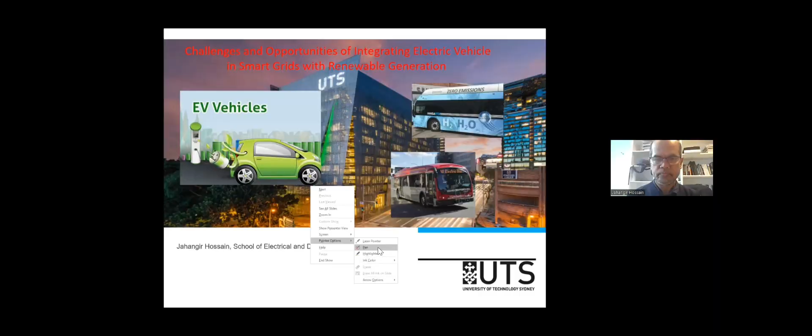Again, I would like to thank you for inviting us to share some of the research that I'm currently doing on renewable energy and also smart grid and the microgrid area. So the title of my talk today is challenges and opportunities of integrating large-scale electric vehicles in smart grid with renewable generation. So that would be my overview of my presentation.

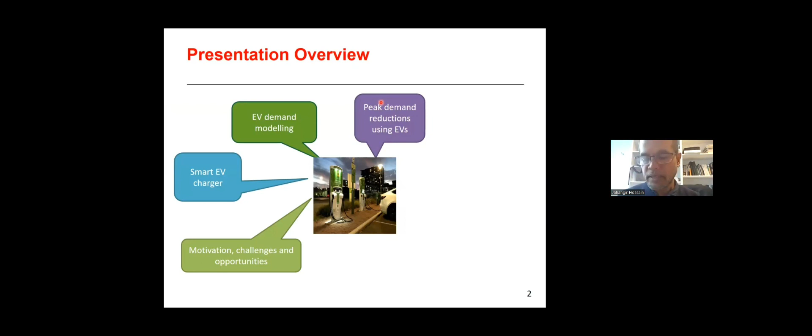So initially, I will start with some background and motivation. Then I'm going to show some of the work that I'm doing on electric vehicle charging systems and also electric vehicle modeling and also integrating large-scale electric vehicles in the smart grid or microgrid. And then I'm going to briefly show some of the other projects that I'm currently leading at UTS.

Now, as you know, due to this large-scale renewable energy integration or energy transition, there are several changes happening in the power grid. For example, if you think about the generation side of the power grid, mainly the large-scale centralized fossil fuel power station is being replaced by small size renewable generation. Because as you know, currently most of the power is coming from centralized power stations, which are mainly powered by coal, gas, and other fossil fuel sources.

Now, if you go to the transmission sector, due to large-scale renewable energy generation, there are some changes happening. For example, you will see many fast, accurate measurement and monitoring devices, for example, phasor measurement units, many power electronic-based controllers, for example, STATCOM, SVC, and also high voltage DC is getting more popular than high voltage AC.

Now, the biggest changes are actually happening in the distribution sector, where you'll find many small size distributed generation, for example, photovoltaic systems, wind turbines, biomass, and so on. Another technology also getting popular is microgrid. And then you'll also find many smart meters, and then new types of load, which is plug-in electric vehicles or electric vehicles, which is actually the main topic of my presentation.

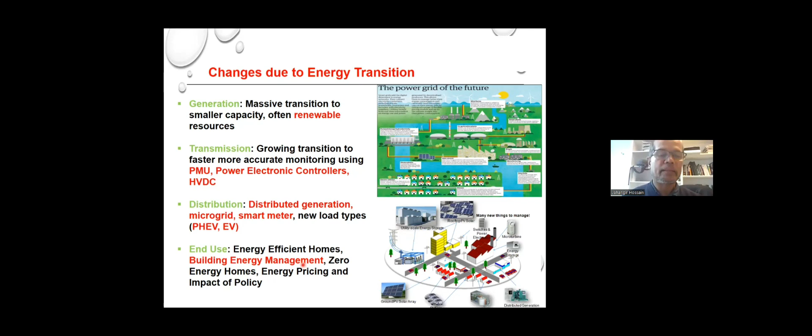Although I have done work in all of these areas, today I'm just going to highlight the electric vehicle side. Now, even after the electricity meter, many things are happening. For example, building energy management systems, zero energy homes, and then energy pricing and so on. Now, let's move on to the electric vehicles.

Now, the electric vehicle is actually not a new technology, although it is getting popular now. The first electric vehicle was actually built in 1981 by a chemist from UK, whose name was William Morrison. So the first vehicle was built in Des Moines, Iowa, USA. And the maximum speed of that vehicle was 20 miles per hour. That vehicle was powered by a 24-volt battery. And with a single charge of the battery, the vehicle could run maximum 50 miles.

Now, after that, for more than a century, nothing much happened for electric vehicles due to political and other reasons. But as you know, in recent years the electric vehicle is getting popular all over the world, including Australia and other countries.

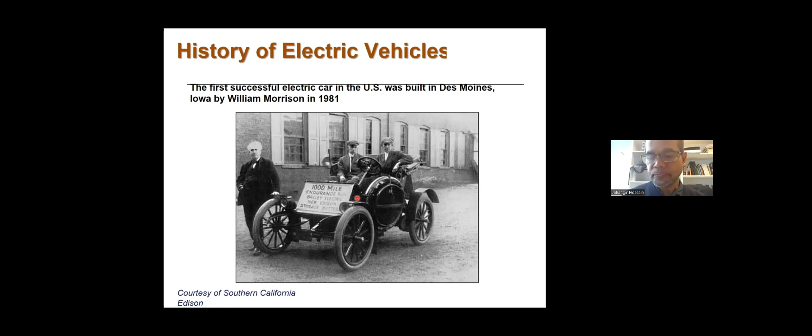And the reason behind this is because the transportation sector is actually responsible for producing almost 1/3 of total greenhouse gas emissions. Now, as you know, most countries have set a target to go net zero by 2050. To achieve the target, the transportation sector has to be electrified. And that's the reason that by 2050, most of the current IC engine-based vehicles will actually be replaced by electric vehicles. Now, there are actually a number of reasons why the electric vehicle is getting popular.

And the first reason is lower lifetime cost. Although you can say that the upfront cost for an electric vehicle is very high, like when you buy, the price is still high. But if you compare the lifetime cost, today the electric vehicle is actually less expensive than the normal IC engine based vehicle. And here you can see that initially the electric vehicle was costlier than the IC engine based vehicle, but after a few years the electric vehicle is cheaper than the IC engine based vehicle.

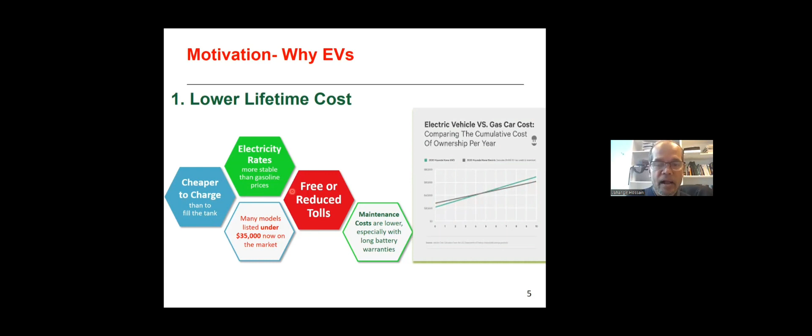And there are a number of reasons. Because it's cheaper to charge than to fill the tank with petrol. The electricity price is much more stable than petrol, because the petrol price actually varies even within a week. An electric vehicle has less maintenance cost, and in many countries there is no toll, and also many governments are providing subsidies or making it tax free when you buy a new electric vehicle.

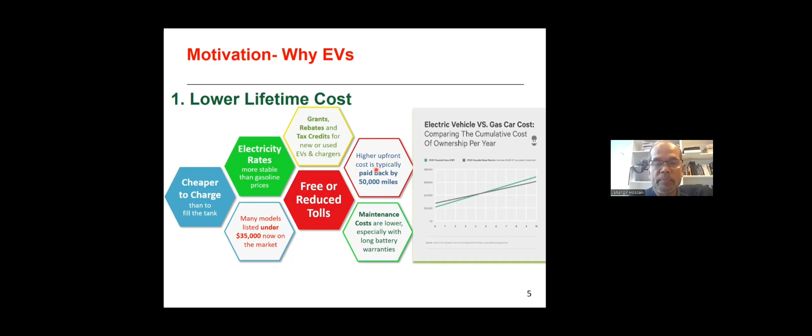And with one set of batteries, you could run almost 50,000 miles with a single battery. And with that, the lifetime cost is already cheaper. The second reason for getting popular is that the efficiency of the IC engine based vehicle is very low.

Now this figure is just showing some data from 2005 Toyota, but even if you use a recent vehicle, the efficiency would be in the range of 20%. What you can see here, for example, if you have a Toyota 2005 vehicle and you are taking, let's say, 100 liters of petrol, out of 100 liters of petrol, what is happening? Almost 76% of the energy is lost in the IC engine. And on top of that, another 8% of energy is lost in idling.

Idling means that your vehicle engine is on, but you're just waiting in front of a red signal or in a traffic jam. So at the end, only 16% of the energy is transferred to the drive line. And in the drive line, another 3% of energy is lost as mechanical loss. So at the end, you are getting only 13 to 20% efficiency.

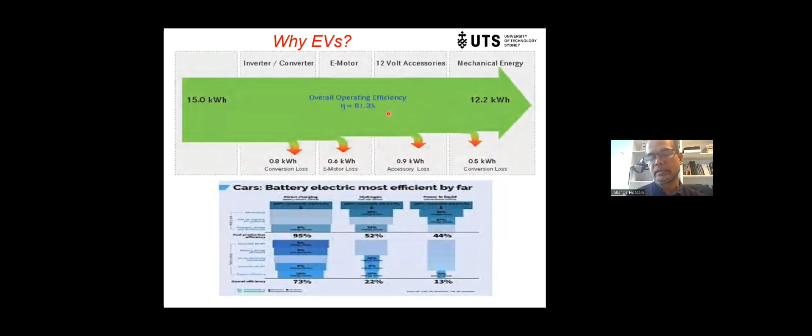But for electric vehicles, the efficiency is much higher. If you compare the overall efficiency, considering the losses in the inverter, charger, motors, and all of them, efficiency is more than 80%. So it is much more efficient than an IC engine based vehicle. And as I said, it's lower maintenance, because for electric vehicles there are no spark plugs, there are no timing belts, there is no oil change. And as I said, the electricity price is lower than the petrol price.

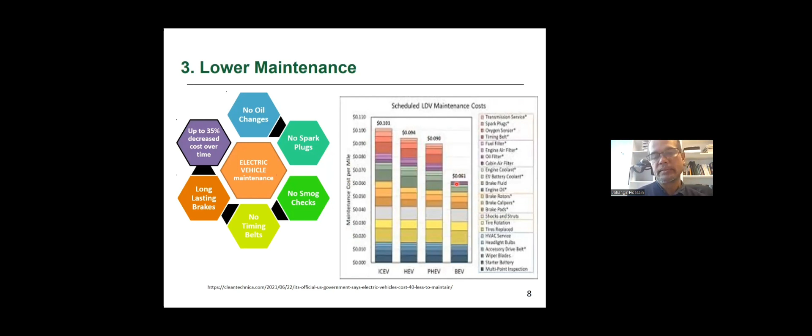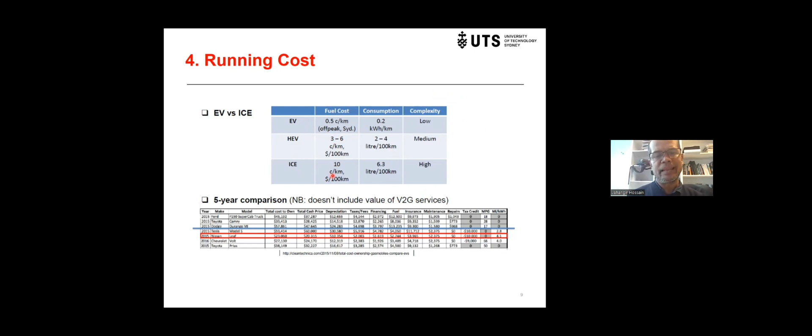Here I just compared the running cost per kilometer for different types of vehicle. The battery pure electric vehicle's maintenance cost is lowest compared to plug-in, hybrid, or even IC engine-based vehicles. Even if you compare the running cost, electric vehicles are much cheaper than IC engine-based vehicles. Here we just calculated the price per kilometer with the Sydney electricity price for EV, hybrid, and IC engine-based vehicles. For EV, it's 20 times less than an IC engine-based vehicle.

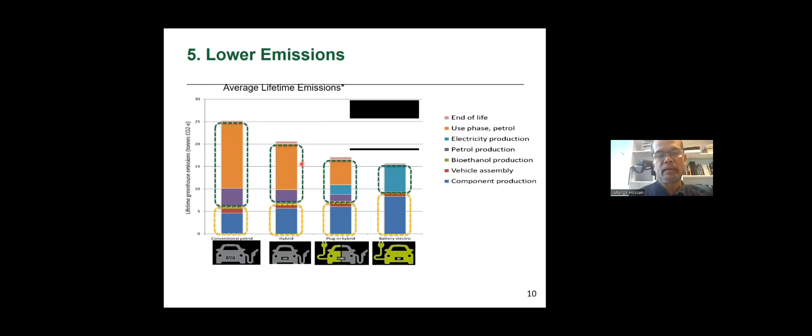And also, as I said, it is environmentally friendly. The emission is much lower than a normal IC engine vehicle. Now, in terms of technology, there are many technologies available powered either by battery or hydrogen fuel cell. And for battery, it could be a hybrid electric vehicle, plug-in hybrid vehicle, or pure electric vehicle. I think in coming years, the pure battery vehicle would be most popular for small-scale cars. But for heavy vehicles like trucks and trains, maybe fuel cell powered electric vehicles would be more popular, because for heavy vehicles you probably need frequent charging. In that case, hydrogen would be a better choice than the normal electric battery.

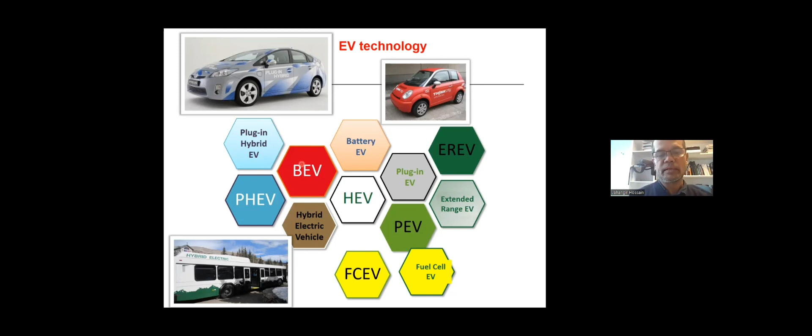Now, if you want to buy an electric vehicle, there are a few things you need to consider. For example, what sort of driving range you need for your daily use, and what sort of charging infrastructure you have. Is it charger level 1, 2, 3, or 4, which I'm going to discuss in the next slide. These are things to consider if you're planning to buy an electric vehicle.

Now, there are some challenges why the number of electric vehicles is still not very high, and here I have mentioned some of them. I already mentioned the cost of electric vehicles, the range of electric vehicles, and also the charging infrastructure. But the good news is that the battery price is going down almost 15% every year. For range, although the average range is about 135 to 140 kilometers on a single charge, with the latest Tesla you can actually run 700 to 800 kilometers on a single charge.

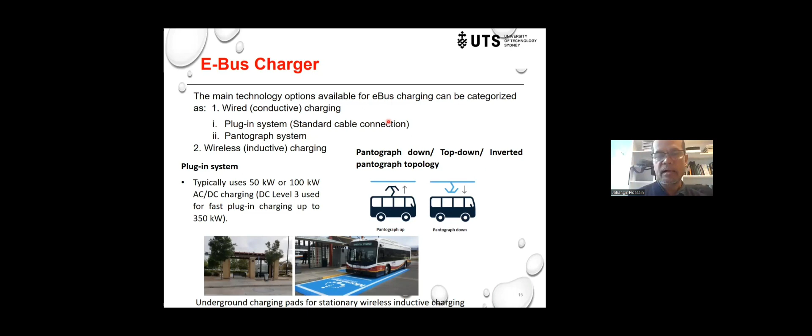The pantograph one works when the bus is just stopping, either to take more passengers, and during that time there would be an overhead charger which automatically connects with the bus's charging system. The bus gets the opportunity to frequently charge, and that's how it will not need a very big capacity. But if you use just a standard cable, because the bus will run the whole day, you actually need a very high battery capacity, which is not economical.

In coming years, you will have electric car charging systems in industry, in your office, in your home, in the shopping center, and so on.

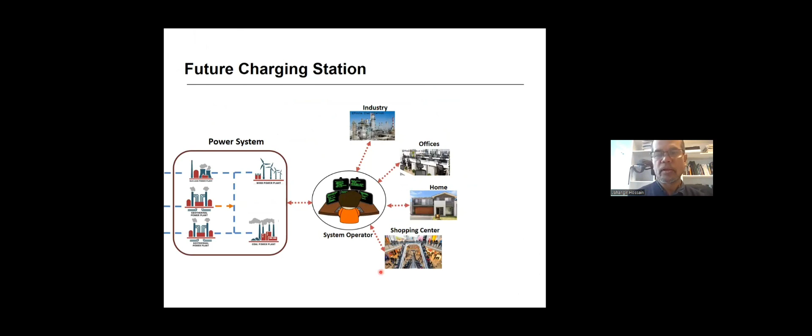As I said, although the electric vehicle number is quite low, the number is actually increasing significantly. But in some European countries, they already have more than 40% of vehicles as electric vehicles. One example is Norway.

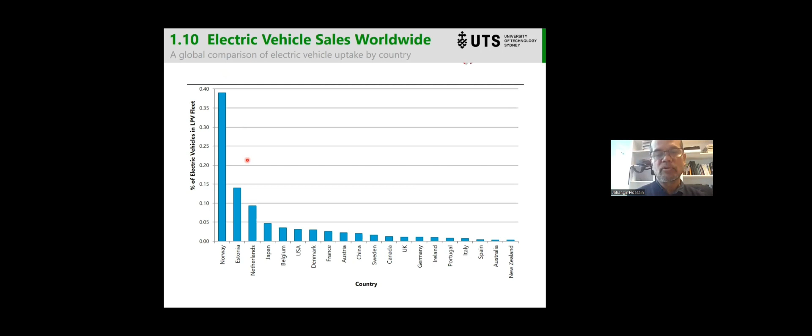But in Australia, the number is quite low. By 2030 or 2035, almost 30 to 40% of vehicles will actually be electric vehicles.

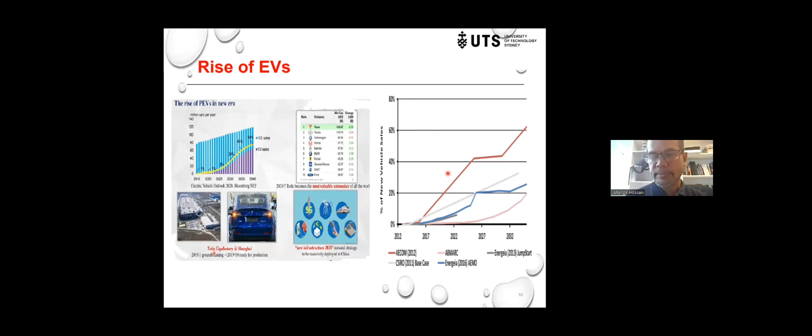Now, what happens when you have a significant portion of vehicles as electric vehicles? The electricity demand on the grid will go up significantly. And if we can't take appropriate action to control the charging and discharging of the battery, it will have significant impact on the power grid.

Here in the top two figures, you can see the black line showing the current electricity demand in two states, Texas and California. If they have 100% electric vehicles, the blue one would be the additional demand on the electricity grid. The bottom figure shows the additional power requirement from the electricity grid when they have 100% electric vehicles. So what I'm trying to say is that it will have significant impact on the power grid in all countries, including Australia and Indonesia.

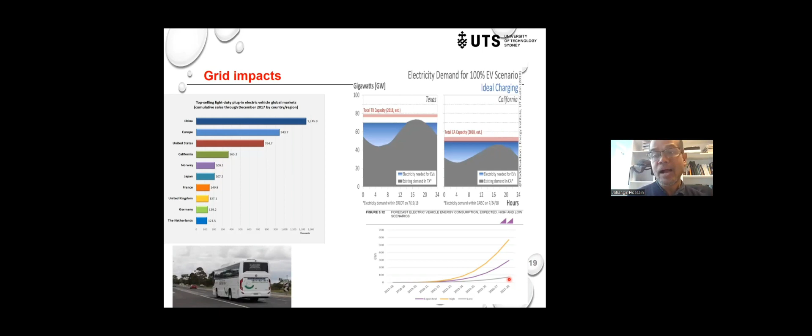So we actually need to have a proper plan for how we're going to manage large scale electric vehicles in the power grid. When you have large scale electric vehicles in the power grid, there will be a number of challenges. For example, it will have significant impact on power quality, voltages, frequency, and so on.

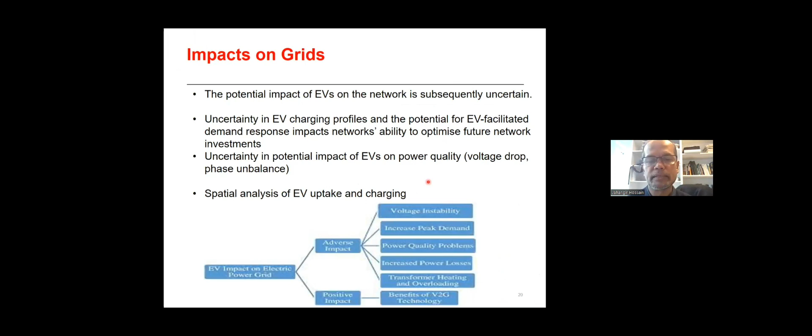But the good news is the latest technology, called vehicle to grid. So it's not only that you will charge the vehicle from the grid, but it will also have the capacity to feed power back to the electricity grid using this technology. Once we have that technology, it will actually be able to solve some of the problems introduced by large scale renewable power integration.

Although this technology has got potential, there are still some challenges we need to address. For example, as I said, this could be a source or sink of power. It has a very high reaction time, and it's like an intermittent mobile source because you don't know the exact location of the electric vehicle. If we can address those challenges, it can actually have a positive impact instead of a negative impact on the power grid. And this technology, vehicle to grid, is already available in the market.

There was a project in Australia, in Canberra. In this project, during the COVID time, what happened was this guy was just participating in this trial. While during COVID he was not driving the car, what he was doing was buying electricity at off-peak time and selling it back during peak time. That's how he actually made quite good money while his car was just parked in his driveway.

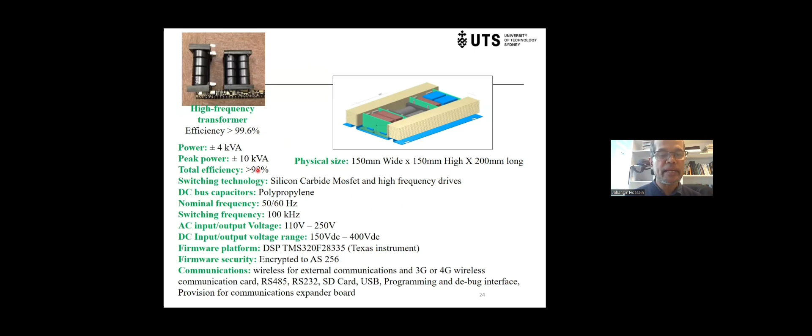The good news is the contribution from our side was including a number of new control capabilities with the car charging system, which not only charges or discharges, but when connected with the home or grid, can actually solve many of the problems created due to large scale renewable energy integration. Some of the control functions include charge, discharge, and ancillary services like reactive power control, voltage control, and harmonic reduction.

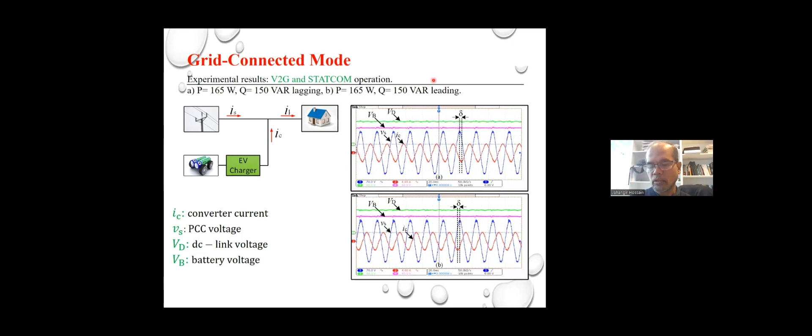So once this is connected, it not only charges, but also solves that power quality problem. This one shows it can actually improve power quality. Here you can see the source current is quite distorted, not a sine wave - this is before connecting our charger. But after connecting the charger, you can see this source current is quite smooth and sinusoidal.

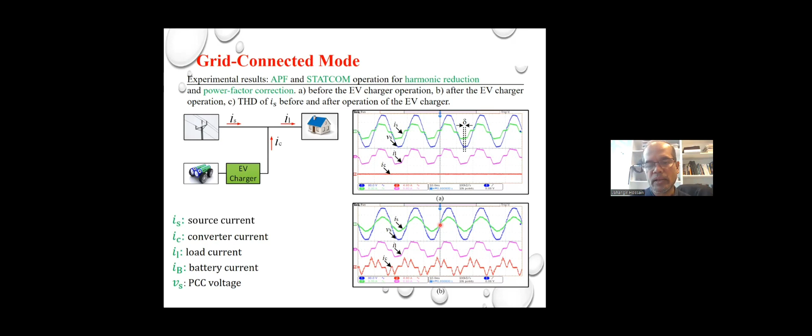In terms of percentage, before connecting our charger to that particular home, the total harmonic distortion was 23%. But after connecting it, it actually went back down to 3.2%. And the standard is that it has to be less than 5%.

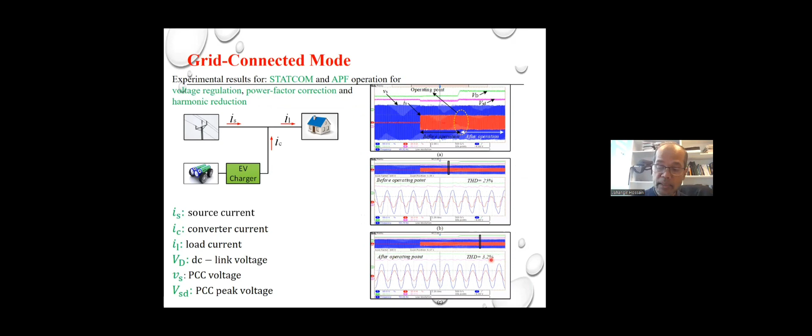Not only that, this charger also has the capability to transfer power from one vehicle to another vehicle. For example, let's say you're driving in a remote area where there's no car charging system available, and suddenly your battery goes empty. The current practice is that you call an insurance company, and that company comes with a big truck with a battery, then charges your battery so you can run your car again. But the good thing is that if someone uses this car charging system, if you have two vehicles nearby, it can easily transfer power from one vehicle to another vehicle.

We also compared the performance of this one with a US patent in terms of overall efficiency and capability. This one also has a safety feature - when it's connected with another vehicle, you can't run unless it's disconnected. That control function is provided through the control pilot and proximity pilot of that particular V2V cable.

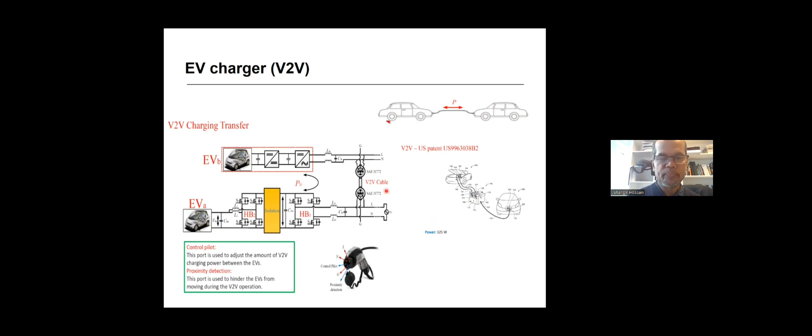Now this one shows again that one of the vehicles is charging and another is discharging, just to prove that concept that I mentioned earlier. Now this is more at the technology level.

Now what happens when you have 100,000 vehicles? The first problem we tried to find out was how you can actually estimate the demand you need from the electricity grid when you have so many electric vehicles. There are a number of uncertainties if you're going to model that electric vehicle demand, because you don't know how many kilometers you will be running per day. You also don't know your starting location, your destination, the road condition, traffic signals, driver behavior, or what sort of car charging technology you're using. So there are so many uncertainties involved.

In one of the projects I was involved in, we designed a car charging system for a shopping center. There is a shopping center near our university, so we collected some data from that particular shopping center, and then we designed the conceptual framework.

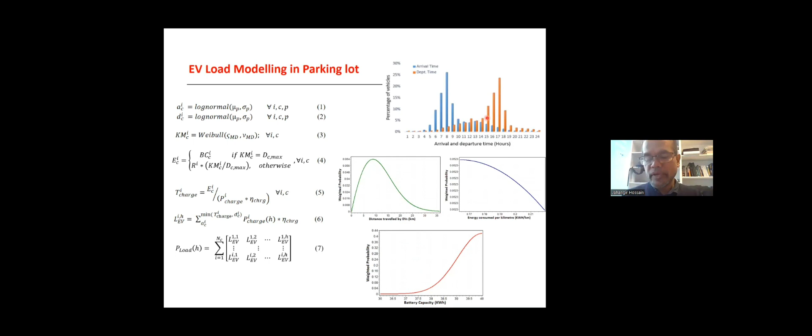we managed to get some probability function that actually gives us arrival time, departure time, like what time the vehicle is coming, what time it's departing, and on average, what sort of power is needed for a particular vehicle. And then considering all different types of technology, we managed to get what would be that particular demand for that particular shopping center, and then what sort of power we can get from that photovoltaic system.

We use that real temperature and the radiation level that is available for that particular shopping center. And then using all those Monte Carlo simulation and stochastic modeling, we managed to develop an optimization algorithm that actually gives that what sort of capacity is needed for that

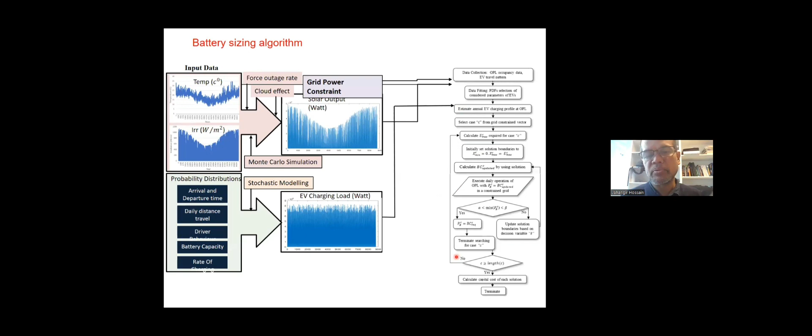battery, and then what sort of capacity is needed for energy need, so that it actually does not violate the maximum capacity of this cable, of the transformer and everything.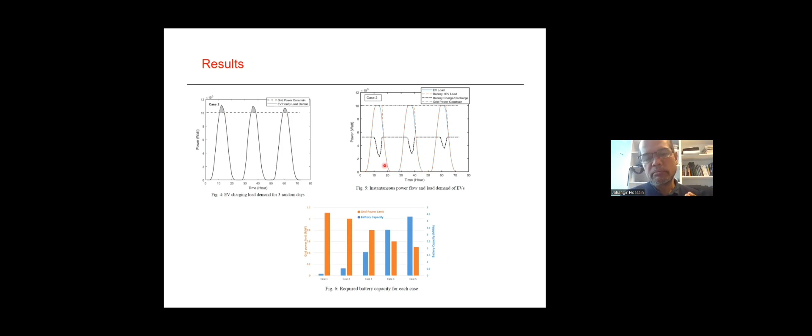And then we compare what will happen without optimization, if you just design the system without considering all those factors that I mentioned. We did simulation and we saw that sometimes it actually violates the capacity of the transformer, which is not accepted by the power grid. And also we did cost benefit analysis with different battery capacities and so on.

Now I'll just show you one more application with the technology that we developed, and then I'll try to finish it. So the next application considers 3 different technologies, like the photovoltaic system, normal battery and electric vehicle, just to show that if we have got a city, for example let's say like Jakarta - here I consider Sydney.

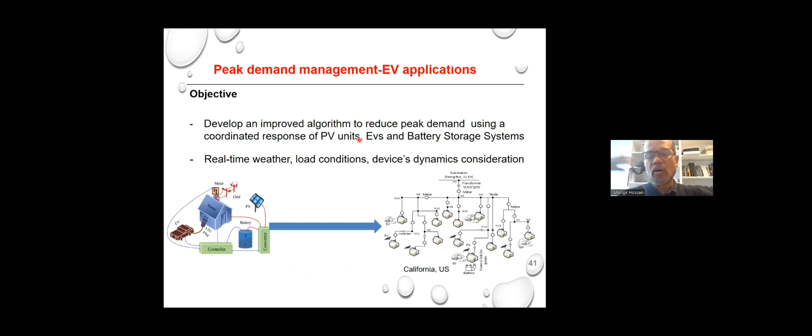If we use that 3 technologies, and then if we actually control the charging and discharging of all this battery, we can see how we can reduce the overall peak demand of that particular city, which will contribute to making the system more energy efficient, and at the same time it will also reduce the electricity price.

Now to do that, we consider different sorts of control. We also consider the remaining capacity of the battery so that it doesn't interfere with the daily use of the electric vehicle. Now with all of this, we developed that model.

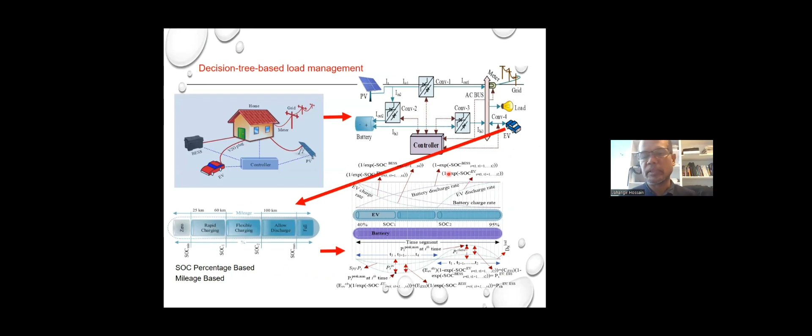And then we implemented it both in the software platform and also in the laboratory with smaller capacity. And here also we developed some optimization using the decision tree and also the artificial intelligence. And then we also compared the performance of both these technologies.

And then we collected the real data from one of that electricity distribution utility, Ausgrid, here. And then we implemented our algorithm with the current electricity demand. So you see that the red one is the current maximum demand.

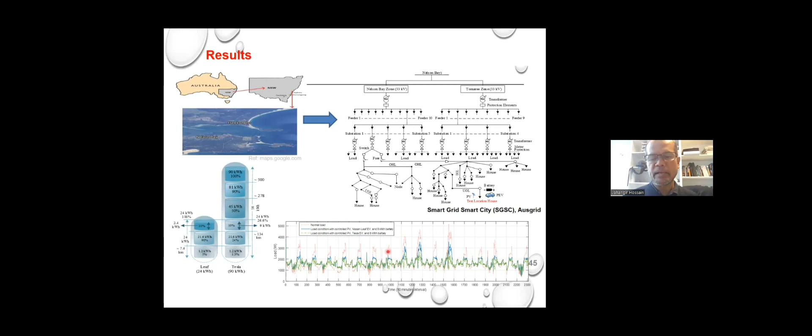But if we use that algorithm that we mentioned here with 2 sorts of electric vehicle, one with a small size battery capacity and another with large battery capacity, shown in blue and green, you can see the electricity peak demand can be reduced significantly using that algorithm that we mentioned.

And again, we compared with the artificial intelligence based algorithm as well, just to validate our idea. And then we implemented it in the lab as well, just to show that it can actually be implemented for a real system, using real devices in our laboratory.

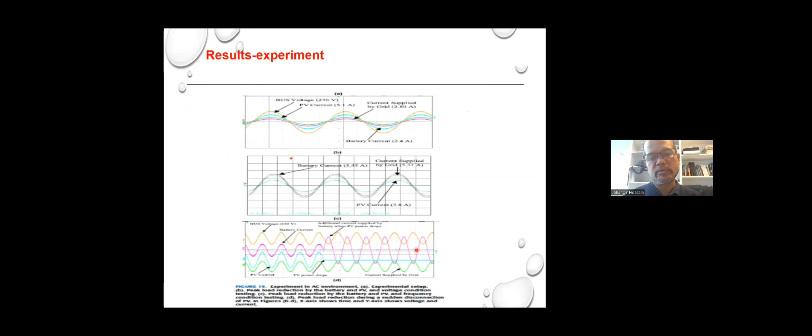Then currently I'm also doing some projects in the microgrid, and one of the projects funded by the Australian government, which is almost $1.6 million. And we are actually building a real microgrid.

And also here we are developing different software and control algorithms for real-time monitoring and also control and forecasting, everything. And also we are connecting with the particular community in that area just to address what sort of concerns they have about that particular microgrid, which is now running in its 2nd year.

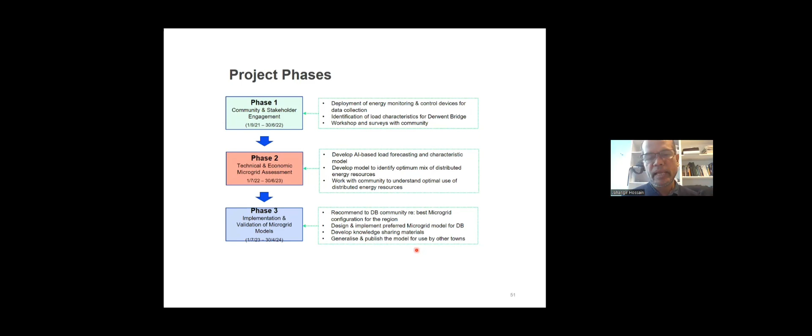And if I get another opportunity, maybe later, I can show some of that technology and algorithm we are developing from that real microgrid project that I'm doing.

And here we have got a number of industry partners involved, from the technology level, also the power grid.

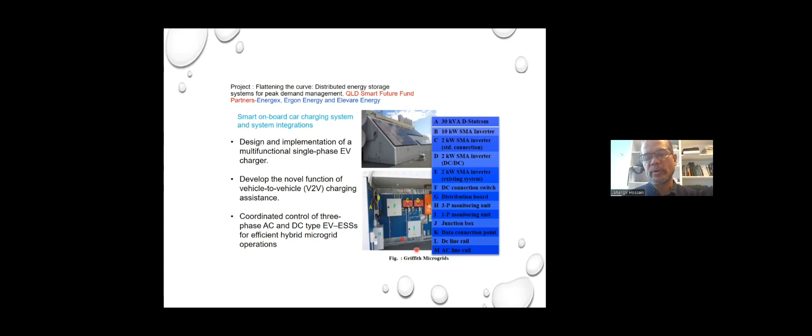And here also you can see some of that microgrid that we even have on campus in the building, with different sorts of battery, inverter, converter, and monitoring and control devices. This is another project also funded by QLD Smart Future Fund on the microgrid.

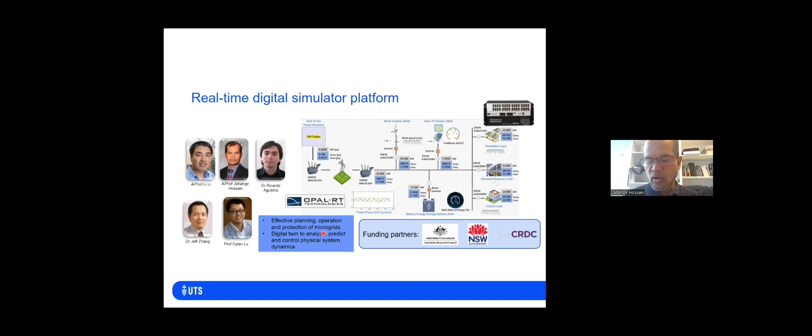And here we're actually developing some smart energy management system with a small scale building and commercial type microgrid. And also in our lab, we actually have got all that infrastructure needed to do real-time experiments with photovoltaic systems, wind turbines, different sorts of inverters, converters, and also that OPAL-RT technology, which has got fast computing power.

And also that control objective as well. We have also some interest in the cybersecurity side of the smart grid with large scale renewable, because this is quite a significant issue for different countries. And fortunately, I was involved in one of the projects funded by the New South Wales government.

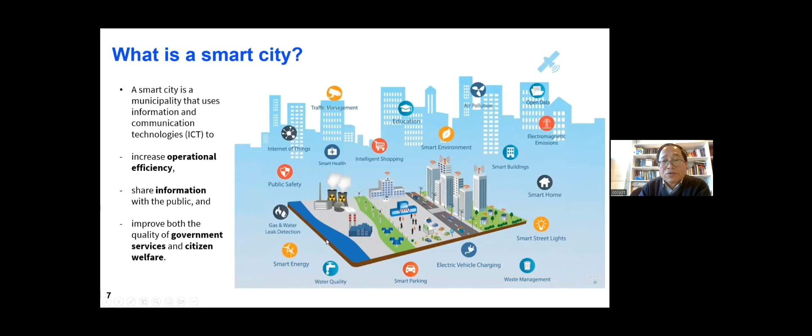So with that, what are the key technologies for a smart city? You can see that we have, in general, 5 technologies. First is smart energy.

We need enough energy—that includes, for example, electric cars, smart grid, like Professor Hossain mentioned, or smart transportation, where EV is on the road and connected to the grid, for example, and smart data, where you can communicate and retrieve all the data necessary for your life.

And also smart IoT, Internet of Things enabled devices—everything hooked up to the network, and you can identify anything on spot. Also smart infrastructure, because we need transport, as I mentioned. The smart city should be interconnected, should be interactive, and should be interbeing.

So which among the 6 factors makes a smart city—smart people, smart living, smart environment, smart governance, economy, and mobility—is the most important? Of course, we are humans, we live, so probably I think the most important is coming from life.

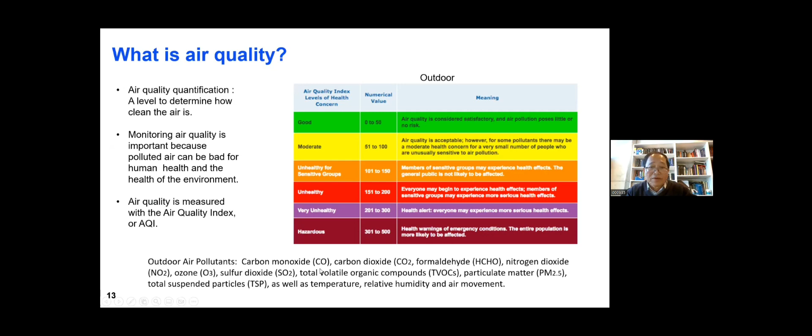Ozone, background ozone, is a harmful gas. We know that ozone up there is protecting the Earth from radiation, but however, at the ground level, it is an air pollutant. Also dust is a serious problem, and also volatile organic compounds, etc.

So how is the air quality index calculated? Normally it has a number. For example, I use this index number for these gases: CO, CO2, hydrogen, ammonia, ethanol, hydrogen sulfide, toluene. And apart from that, oxygen is good—we need that.

So you see that this air quality index for air pollutants—when it is low, it is good, but when it is higher, then it moves to unhealthy, unhealthy for sensitive groups, or unhealthy, very unhealthy, and hazardous. For oxygen it is reversed—we need it, so the lower it is, the more of a problem for us.

In order to have that number, we need a kind of threshold. So it has a breakdown, breakpoints, and breakpoints are determined by experts—medical professionals together with scientists—who work out those breakpoints. We compare against those breakpoints in order to calculate the index, and that index is given in a table. It looks like that.

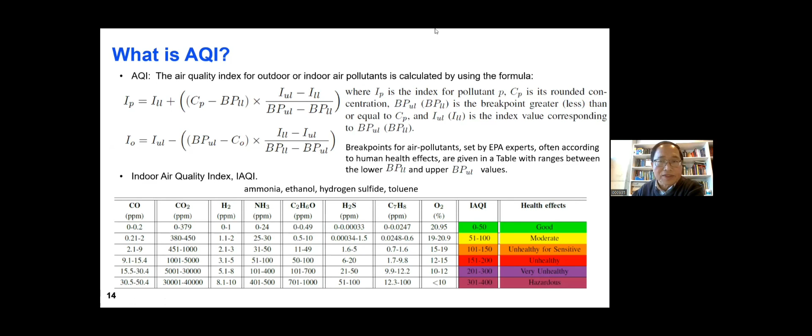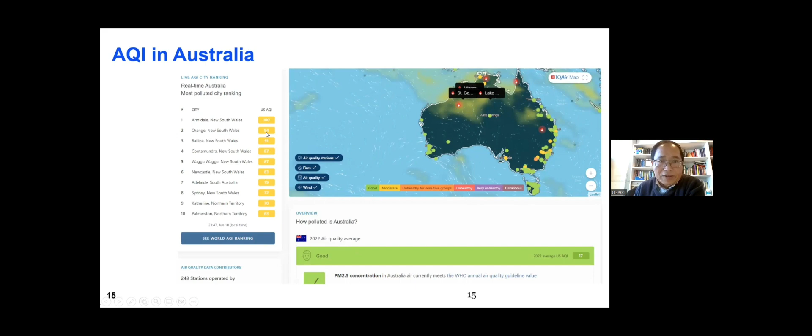So with that, when I prepared this lecture, I checked, for example, AQI in Australia. You can key in, and then you can find this from the website as I did here. So you see that it is rather good, just very moderate. Okay, but if I check Indonesia, I think in general it is moderate, but some city is kind of unhealthy

in a serious concern somehow. Okay, so it is likely above the threshold, and some might be unhealthy. This university, I think I checked, it is also above the concerning threshold. So

how we can have that AQI, we need to use these kinds of air quality models, and a model for that is a mathematical simulation of how air pollutants disperse and react in the atmosphere to affect the ambient air. Okay, and there are three components to be considered. Number one is species emission. Number two, transport. Number three, physicochemical transformation.

This is where all the reactions, for example, photochemical reactions from ozone or other chemical reactions participate in here. And those components go besides the removal process and meteorology.

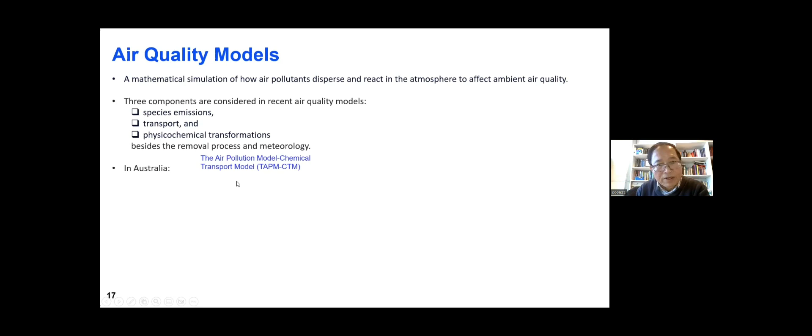Okay, so in Australia, normally the CSIRO scientific organization here proposed the use of TAPM CTM, the air pollution model, chemical transport model. And later on they developed, which is currently used, CCAM CTM, cubic conformal atmospheric model, chemical transport model, where you see that the emissions inventory is here.

Inventory is a collection of data where people measure at a certain time and record the data, and then emission models, and then we have meteorological information data coming here, and first the modeling, and then the chemical transport model goes, and finally it gives you the concentration.

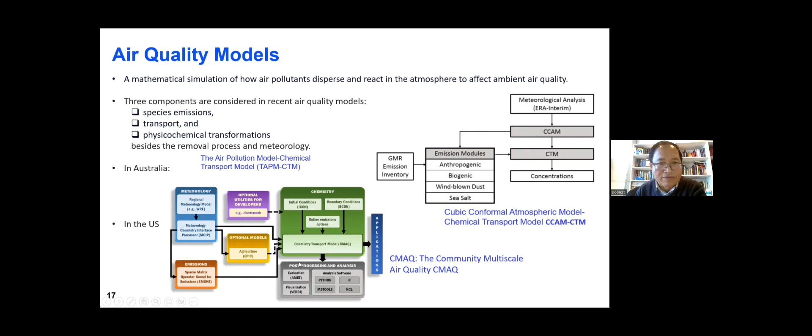In the US, they use CMAQ, which is the Community Multi-scale Air Quality model here. You can see the block diagram from there. That is some. Of course, there are some countries that also have other models. And what are the modeling methods?

You can see that air quality is a profile that is spatially distributed. Okay, it is throughout the city, from the state, and from the state nationally, and linking between country and country as well. So it is a spatial distribution, and it is also a time series, because it is a collection of data

from right now, from the last 3 days, last week, last month, and also for the years, and not only the years in the past, but also the problem for us is that we want to know exactly the forecast of air pollutants in the next 3 days. Normally, we give 72 hours for that. So we have spatial temporal profiles.

And for that, probability and statistics go in there. So we need to know some statistical characteristics like the mean, the average, the median, and also expectation, etc. And data analytics are a tool for you to analyze that. So they are numerical methods.

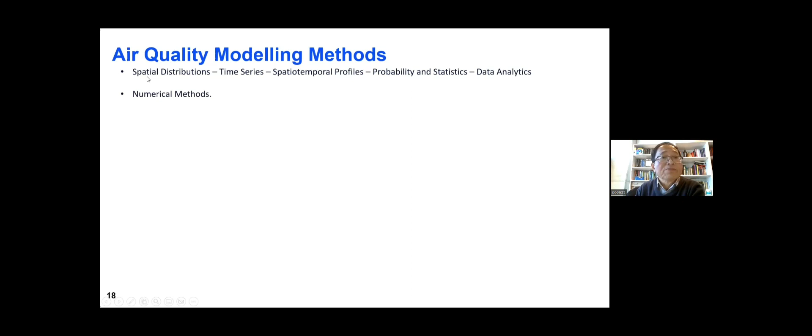And for example, ARIMA, the autoregressive integrated moving average model, which is popular to analyze and to represent stationary as well as non-stationary time series, is used in India. Now, these models are also photochemical tools, as I mentioned, because they contain the embedded photochemical reactions, and dispersion tools, and also inventories where the

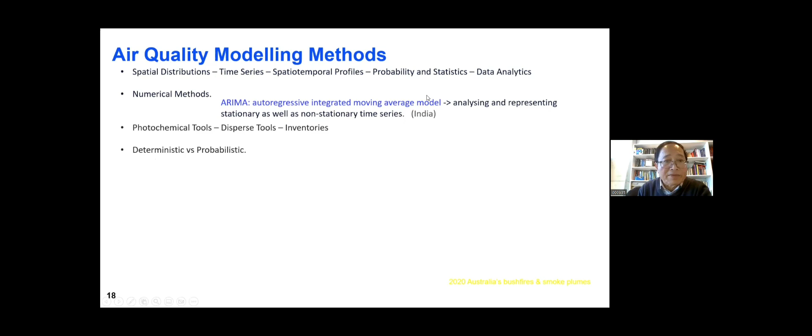people, the authority, need to record by measurements to give you the initial data for the calculation, for the modeling. And it is deterministic versus probabilistic, because with the model, you can use some deterministic tool, but also it involves probability.

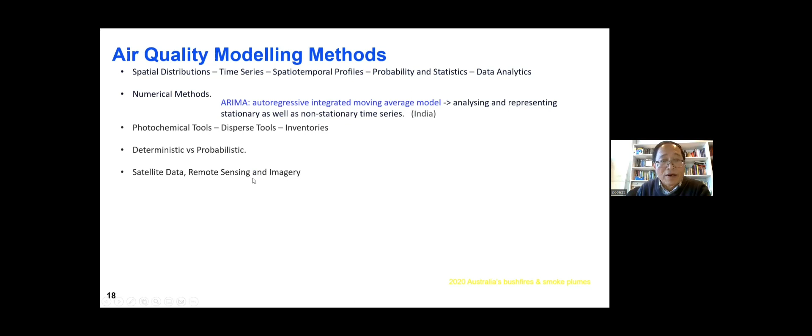And satellite data is also used for remote sensing and imagery. So right here in Australia, we have this meteor satellite launched, and you can see that the bushfire we had 3 years ago, from the summer of 2020, can be captured by satellite instantaneously, basically. So we can have the smoke plumes visualized here.

Now we also have sensor networks and low-cost wireless sensor networks. Sensors are available for us to use.

I have here one chat box: finish by 2:10. Okay. Okay, I will try to finish by 2:10.

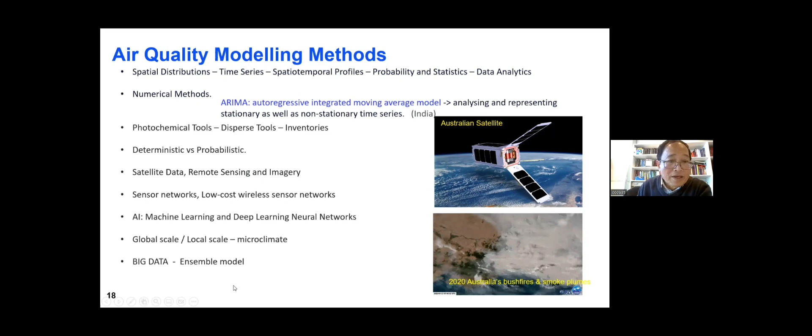And then we have AI, machine learning, and deep learning neural networks for us. And it is a problem of global scale and also local scale, where we can have the microclimate, for example, in this house, in this building. And it is a problem of big data, where ensemble models come in.

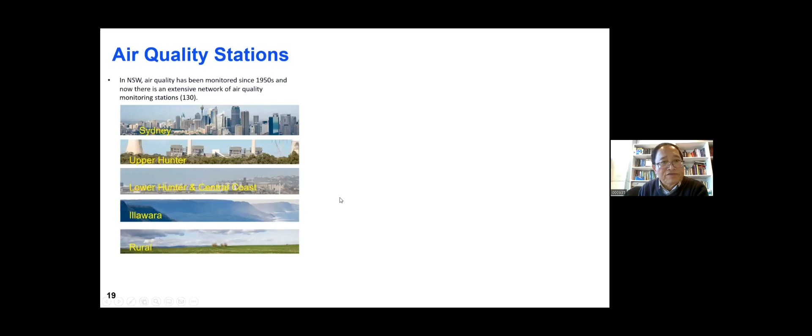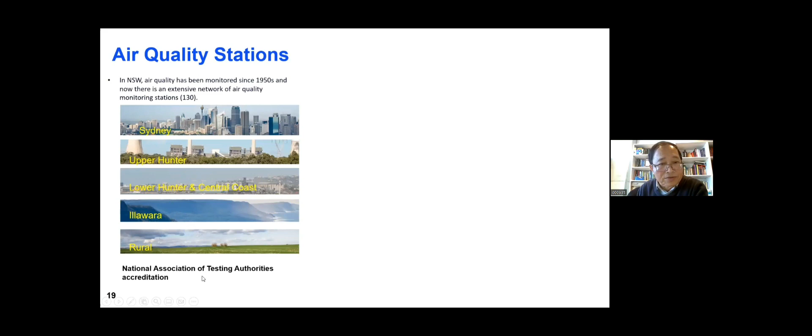Okay, my project working for DPE is how to develop the ensemble model in order to improve the accuracy of the air pollution forecast for New South Wales. So to do that, normally the DPE has five regions: Sydney City, Upper Hunter, Lower Hunter, Illawarra, and rural, under an organization to accredit it.

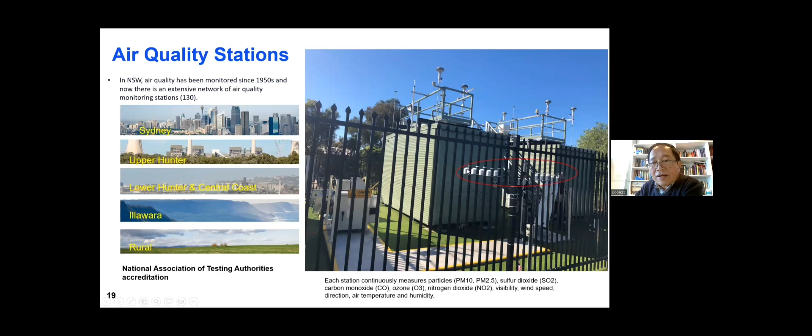Okay, and here is the image of a monitoring station, where we can have observations as a benchmark for us to work out on the data. But right here, you can see a sensor network. The sensor network here is from PurpleAir. You see that it is mounted, co-located to collect the data, where you can see all the data collected from the sensor.

One problem is that the sensor has to be reliable, and it has to be dependable in the sense that it can be available, it can be reliable, it can be fail-safe, to guarantee the accuracy and the availability of data on time. So together, it is an ensemble model.

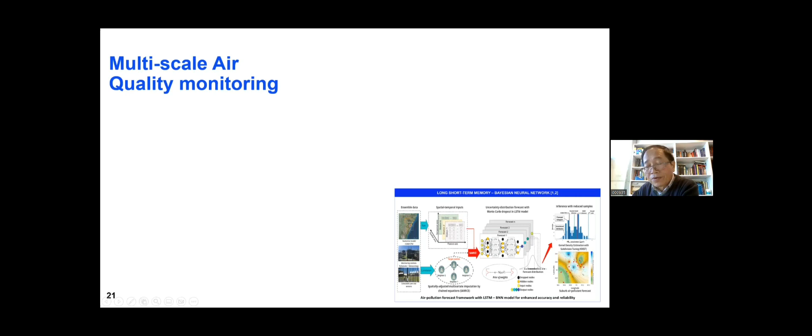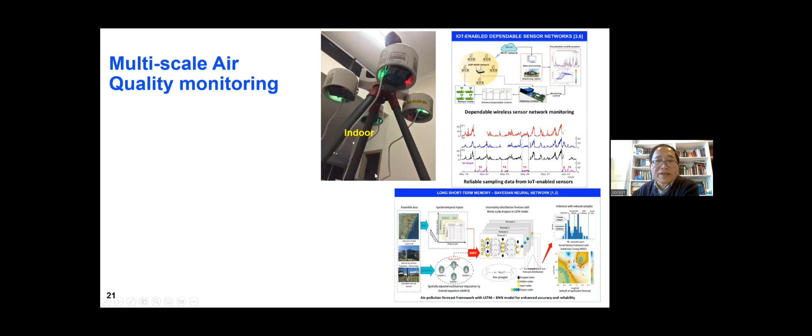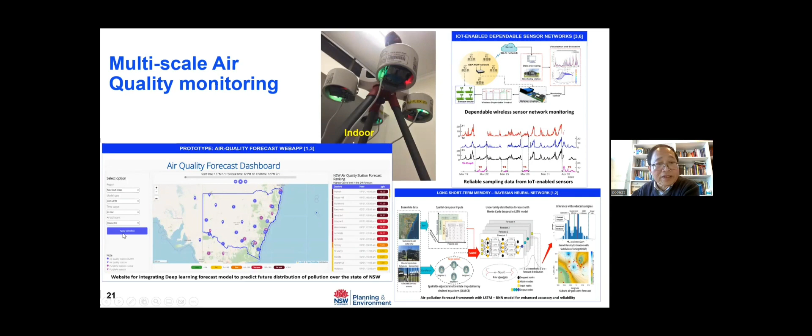You can see that observations come in here, data also come in here from the low-cost sensor network, and here from meteorological data, where the learning mechanism is developed to handle all the uncertainties and to improve the accuracy of the forecast. Here is an image capturing the idea of a low-cost sensing network using PurpleAir. And we developed a prototype website people can access, incorporating the deep learning neural network and the low-cost sensing network data.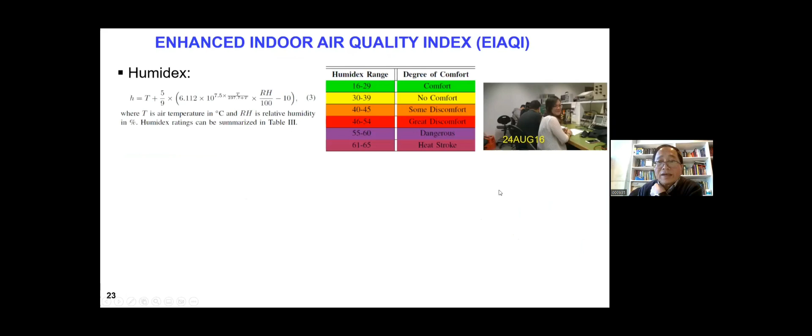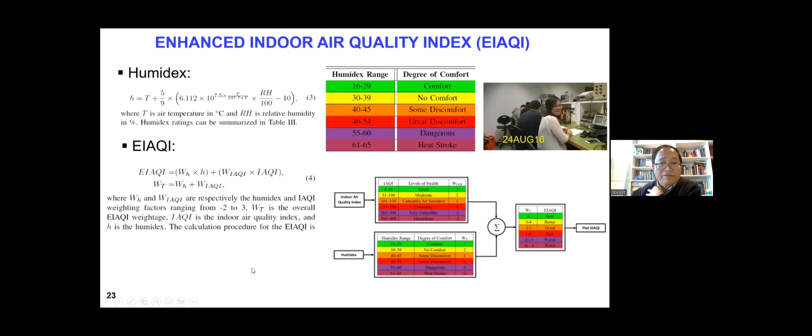So inside the buildings, we have Waspmotes connected to IoT, for example in our building here, and then we can have monitoring data on time for the students and staff inside the building. One student in the lab had a problem, and we showed that the air quality index is okay, but humidity is also involved, and an enhanced indoor air quality index may better reflect the health situation of that student and in general.

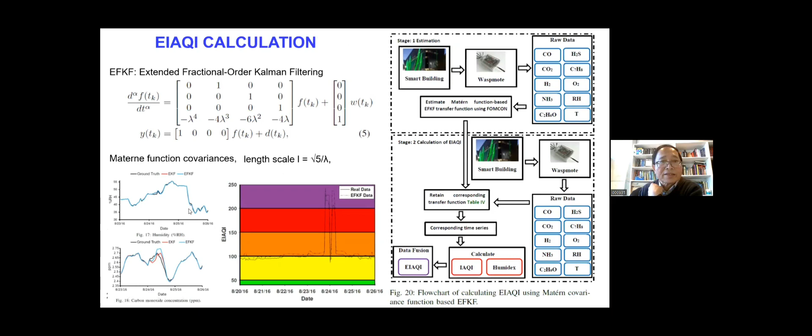Okay. So here is the calculation, where we use an extended fractional Kalman filter with Matérn function covariance. I won't go into depth on that.

And then we have the concept of a smart building, with renewable energy on the rooftop, when this building I'm working in received $50 million from the government to build a smart grid on top, to prove the penetration of renewable energy sources, and also demonstrate that the building management system, energy management system, and sensors are embedded in the structure and can be used for monitoring indoor air quality, as I mentioned. Okay, here is the diagram for that.

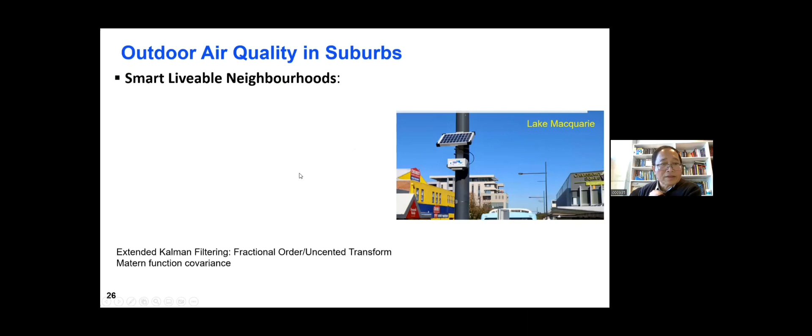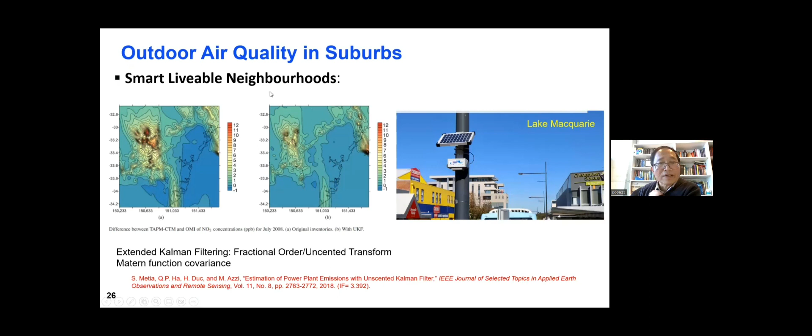Now, for the suburb, we are recently working with a suburb to monitor the air quality to make it a smart, livable neighborhood. Okay, so we extended that work to another suburb, Melrose Park, where in the development, the industry won a big project to build this park into a livable municipal area, with a lot of sensors. You can see the project installed there.

Okay, probably we don't have much time, so I should move on to meet the time.

But I want to mention the finer scale of monitoring and prediction: when we develop construction sites in a city, we also need to guarantee the air quality so that air pollution does not exceed the limit, right? So dust or particulate matter needs to be monitored so the emissions are in the allowable range. And you can see the building site there is monitored via a low-cost sensing network with sensor motes.

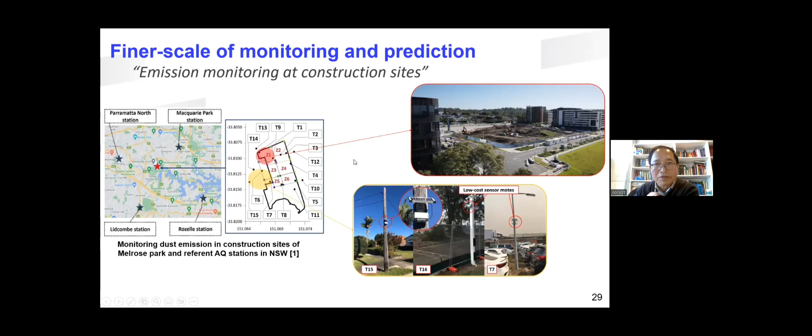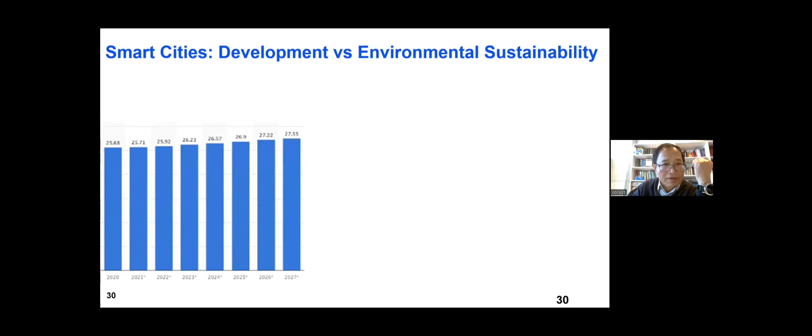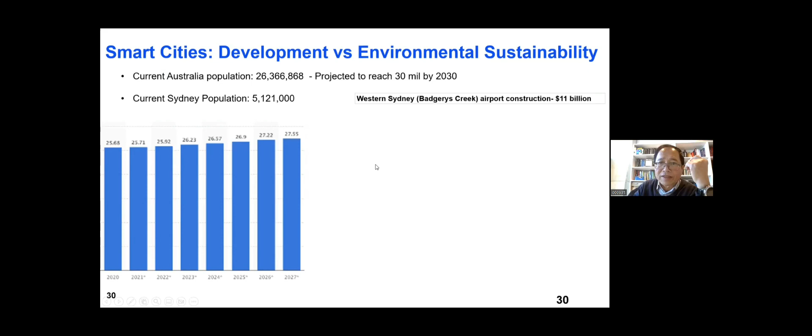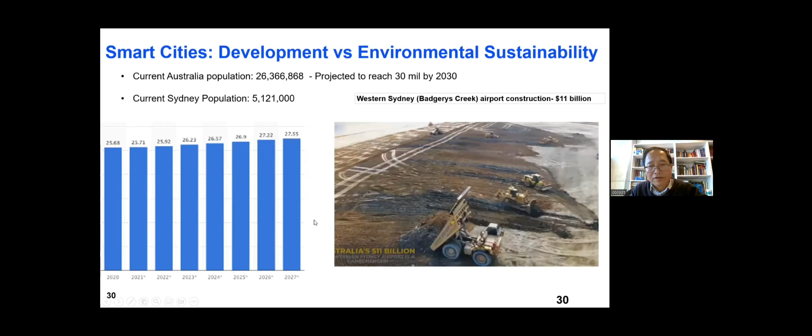So development in Sydney is still moving on. Currently we have, I think, around 26 million, but it's expected to increase. So currently the population is there, but expected to reach 30 million. And together with that, the Sydney population also increases. And the New South Wales government is already on the way to building a new airport, to be commissioned and put into use in 2026.

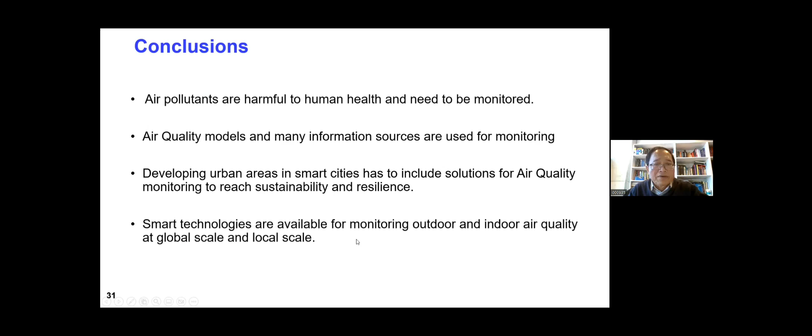So in conclusion, to meet the time, I want to say that air pollutants are harmful to human health and need to be monitored. Air quality models and many information sources are used for monitoring purposes. Also, developing urban areas in smart cities has to include solutions for air quality monitoring to reach sustainability and resilience. Smart technologies are available for monitoring outdoor and indoor air quality at global and local scale.